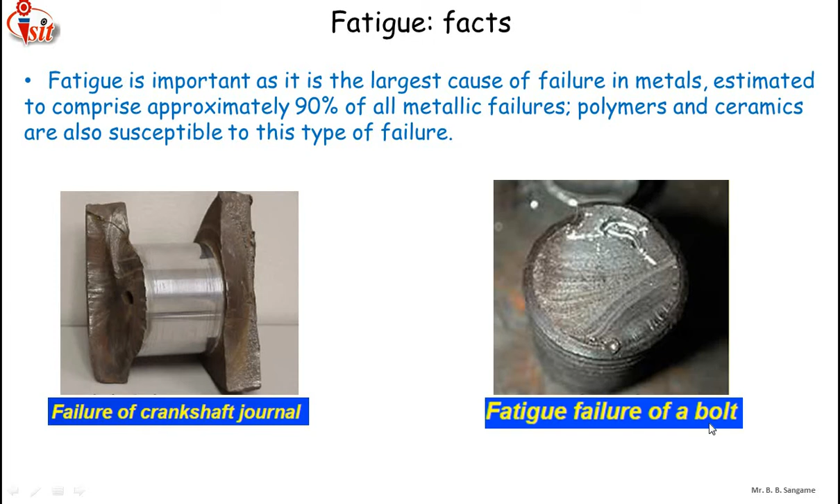So first of all, let us discuss about fatigue facts. Fatigue is important as it is the largest cause of failure in metals, estimated to comprise approximately 90% of all metallic failures. Polymers and ceramics are also susceptible to this type of failure. Here you can see the fatigue failure of the crankshaft and also fatigue failure of the bolt, how the metal or the component exactly fails in the fatigue manner.

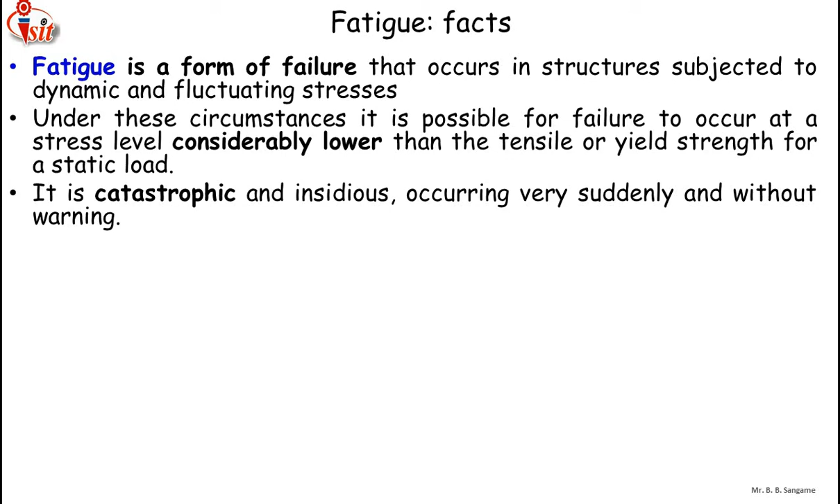Fatigue is a form of failure that occurs in structures subjected to dynamic and fluctuating stresses. In the previous video we have already discussed about the dynamic and fluctuating stresses. Under these circumstances, it is possible for failure to occur at stress levels considerably lower than the tensile or yield strength for a static load. It is catastrophic and insidious, occurring very suddenly and without warning. It is a primary design criterion in rotating parts.

Fatigue is a name for the phenomenon based on the notion of materials becoming tired and failing at less than its nominal strength. Cyclic strain or stress leads to fatigue failure. We have discussed in the previous video regarding the cyclic stress.

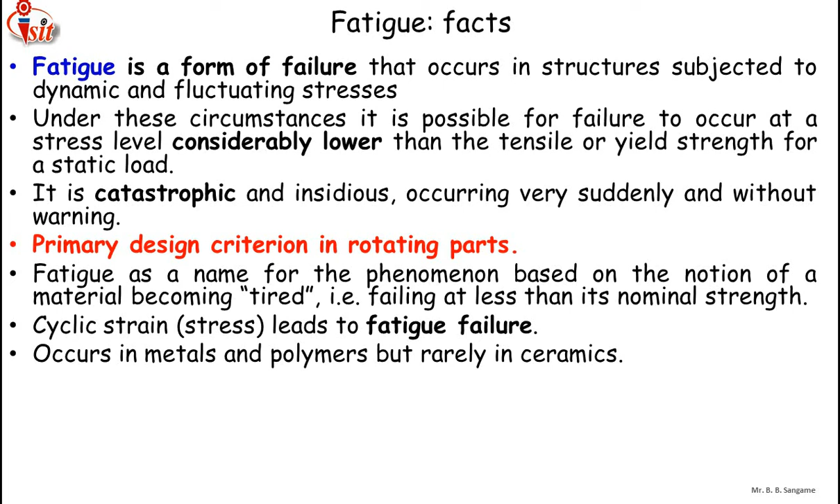Fatigue failure occurs in the metals and polymers but rarely in the ceramics. Also, it is an issue for static parts like bridges. So here you can see the fatigue failure in a bolt.

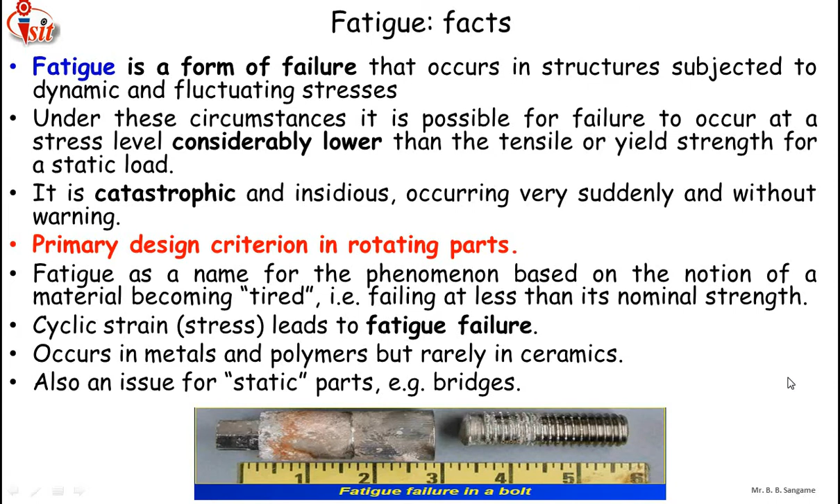Most applications of structural materials involve cyclic loading. Fatigue failure surfaces have three characteristic features: a near surface defect as the origin of the crack, striations corresponding to slow intermittent crack growth, and dull, fibrous, brittle fracture surfaces, which is the cause of rapid growth of fatigue failure.

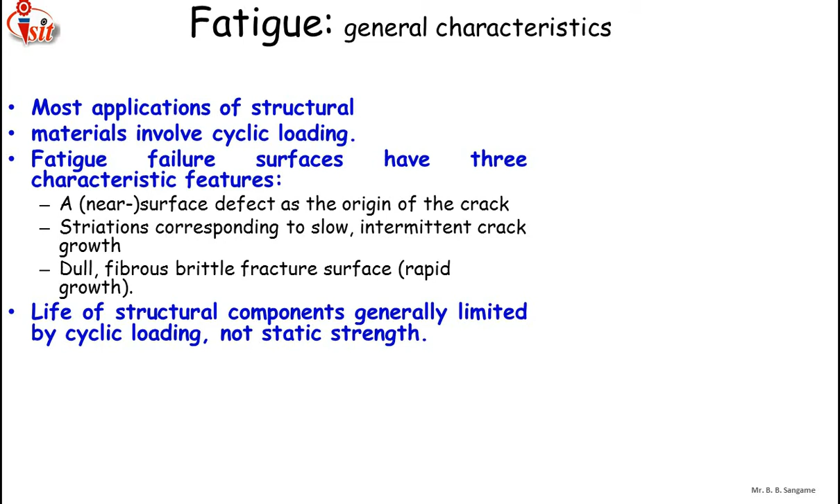Life of structural components is generally limited by cyclic loading, not static strength. Most environmental factors shorten the life of a component. These are the main characteristics of fatigue.

Here you can see the crack length exceeds a critical value at the applied stress. Here the initiation of crack starts and how the fatigue crack propagation occurs, or how catastrophic rupture or failure occurs. Here you can see that.

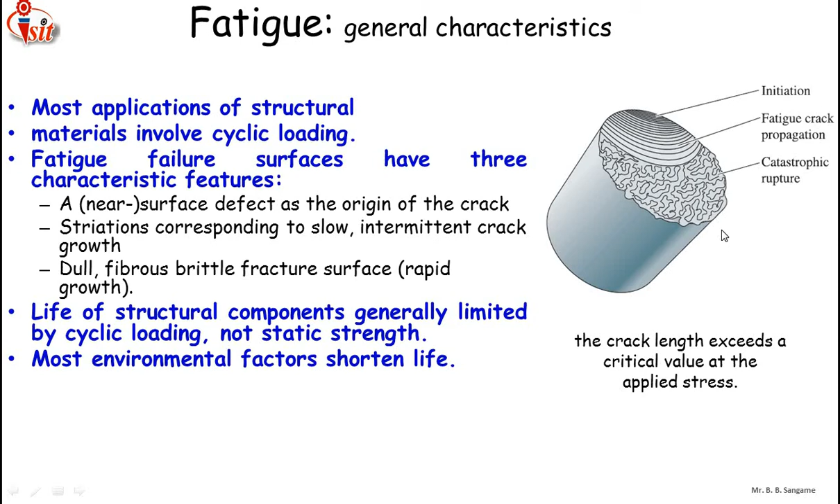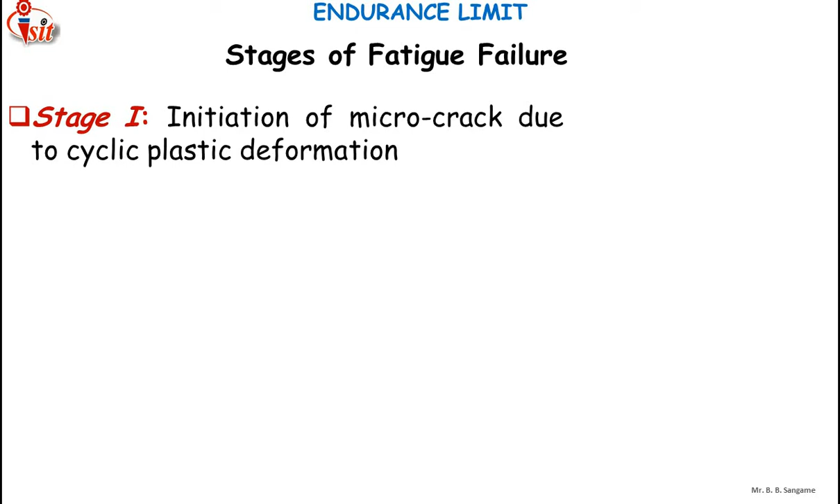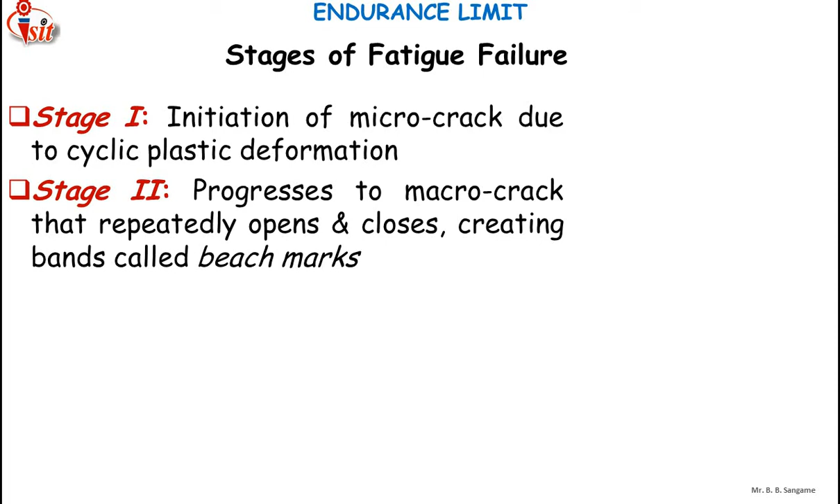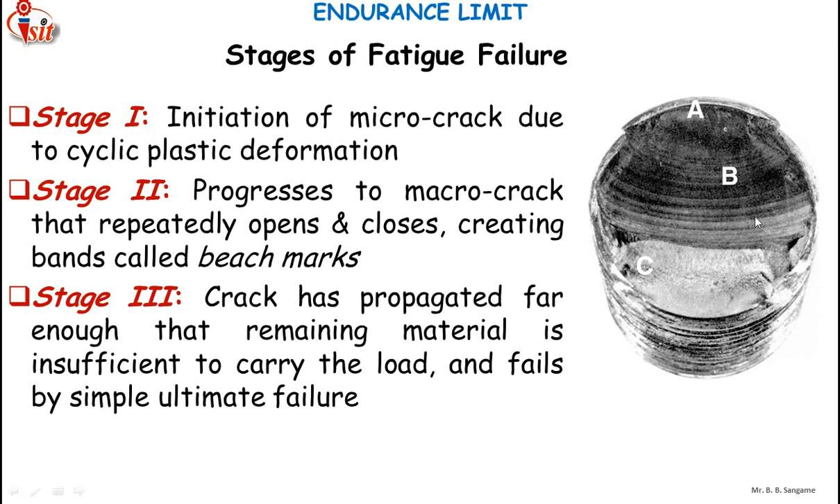Stages of fatigue failure: first stage is initiation of micro crack due to cyclic plastic deformation. Second stage progresses to macro crack that repeatedly opens and closes, creating bands called beach marks. Third stage is when the crack has propagated far enough that remaining material is insufficient to carry the load and ultimate failure will occur. Here you can see the stages of fatigue failure.

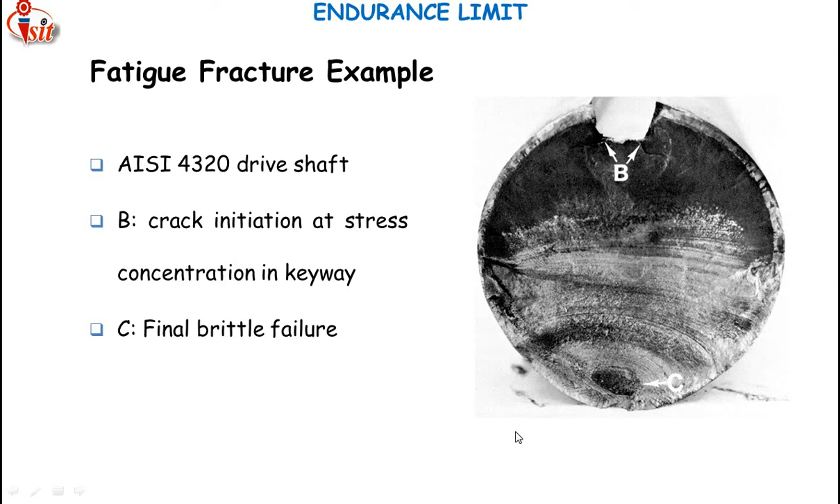These are the basic factors causing fatigue failure. First is maximum tensile stress of sufficiently high value, which is the main reason of fatigue failure. A large amount of variation or fluctuation in the applied stresses also causes failure. When there is a large amount of fluctuation in the applied stresses, there will be a possibility of failure of the component in a fatigue manner. A sufficiently large number of cycles of applied stresses is the third factor.

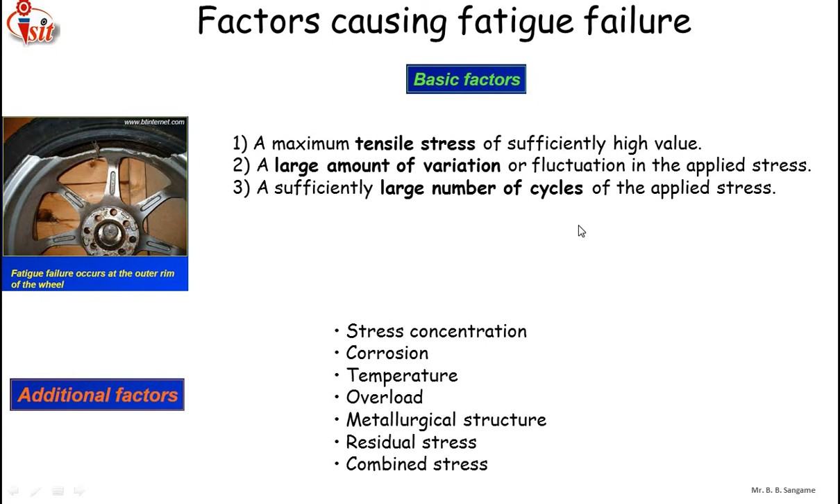These are the three basic factors, and also some additional factors are there. Here you can see stress concentration is one of that. Corrosion, temperature, overloading, metallurgical and structural defects are there. Residual stresses and combined stresses are there. So these are the basic reasons and additional factors which are the main causes of fatigue failure.

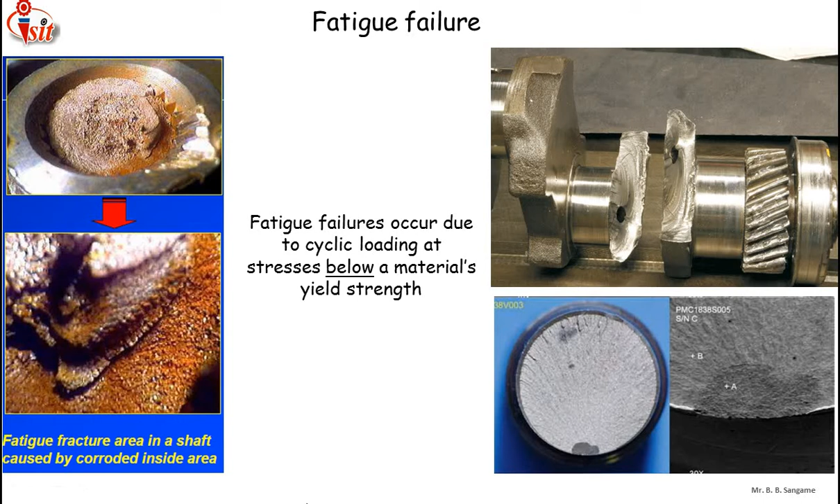Here you can see the images of fatigue failure of a crankshaft. So how the failure exactly occurs, and this is the fatigue failure because of the corrosion.

So now let us discuss about the endurance limit, which is also called the fatigue limit. The fatigue or endurance limit of a material is defined as the maximum amplitude of completely reversed stress that the standard specimen can sustain for an unlimited number of cycles without fatigue failure.

Since the fatigue test cannot be conducted for an unlimited or infinite number of cycles, it is practically impossible to conduct infinite cycles. So 10⁶ cycles is considered a sufficient number of cycles to define the endurance limit or fatigue limit.

The fatigue life is defined as the number of stress cycles that the standard specimen can complete during the test before the appearance of the first fatigue crack. This sentence is very important. The fatigue life is actually defined as the number of stress cycles that the standard specimen can complete during the test before the appearance of the first fatigue crack.

So here you can see the specimen which is used for the fatigue testing. During the fatigue testing, the specimen is carefully machined and polished. The final polishing is done in the axial direction in order to avoid circumferential scratches. Scratches are avoided to avoid stress concentration and to get accurate results. So proper polishing is done.

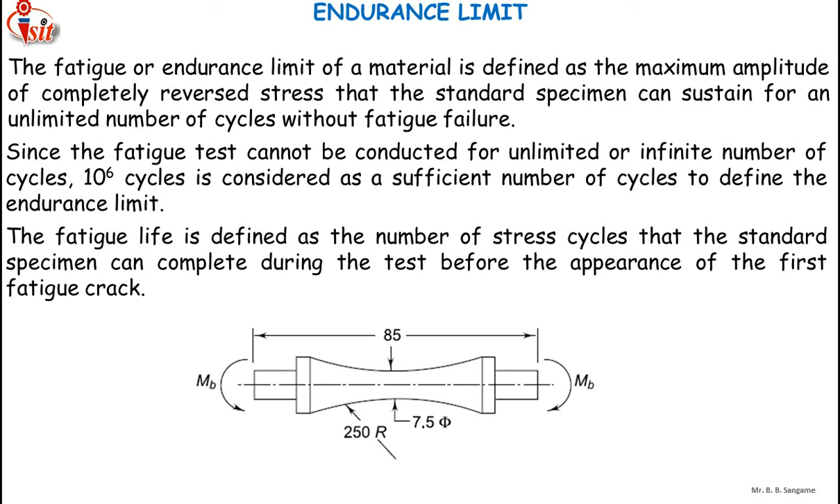R.R. Moore is a scientist who developed the machine which is used for checking the endurance limit or fatigue limit of the material.

The principle of the rotating beam machine - here you can see how the rotating beam machine looks exactly. It includes a beam of circular cross section which is subjected to bending moment MB.

The upper half is subjected to tensile stress and the lower half is subjected to compressive stress. At the neutral axis the stress is 0. The fibers present at the neutral axis are subjected to zero bending moment, but the fibers at the extreme topmost position are subjected to tensile stress and the fibers at the bottommost position are subjected to compressive stress.

As the shaft starts to rotate - here is the specimen which is rotated by means of an electric motor, and there is a revolution counter which counts how many rotations the component is going to sustain, or whether it will be safe, or whether there will be any kind of crack. As the component starts to rotate, the fibers are subjected to alternating type of stresses.